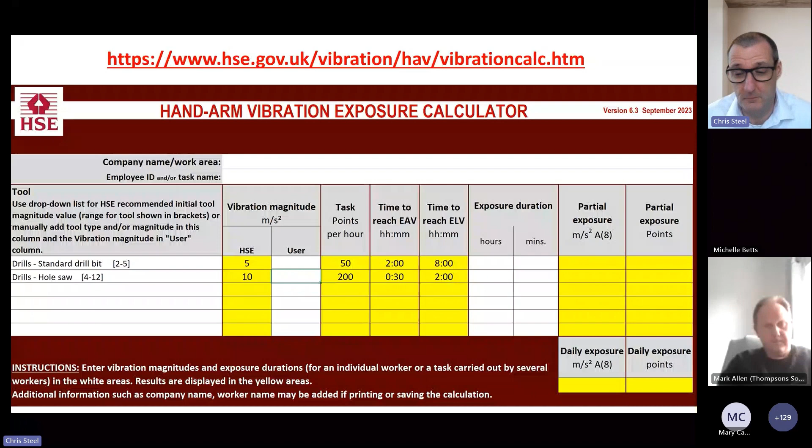So what have we done? Well, the first thing that you might have noticed is that the HAVS calculator has been updated. That's the web address that you can find it at. All we've really done here is make it so that if you now download it onto a mobile phone, it can be used on a phone, because the macros were messing that up. So if you're using an older calculator, that's fine. The thing will still work and the calculations you'll get from it will still be useful. But the new calculator should be something that you can use on your phone now.

We've also removed a PDF version of the vibration data table that used to be up there. That PDF was just a regurgitation of what was in L140. That's gone. You can still find that table in L140, but if you go to this web address, this is where you'll find the vibration data. What I would say is that any updates or any additional tools that we add to that table will most likely appear here first, because this is the simplest thing for us to update. But we've got the range there and we've got the initial recommended values.

Another big change to the vibration page is that we've now got guidance on measurement and monitoring. So in the past, we had a PDF document that was an FAQ on vibration measurement and monitoring. Fundamentally, what we're saying hasn't changed in any significant way. But it's now in a web page for accessibility reasons, and also it's actually written specifically with the duty holder in mind. I think the previous one was sort of trying to speak to multiple people at the same time and not doing a good job of that. So that's the web updates.

The measurement and monitoring practice that we're looking at, what our expectations are, is essentially what is in that page. But let's just pause for a second and remind ourselves what HSE's minimum expectation is for duty holders.

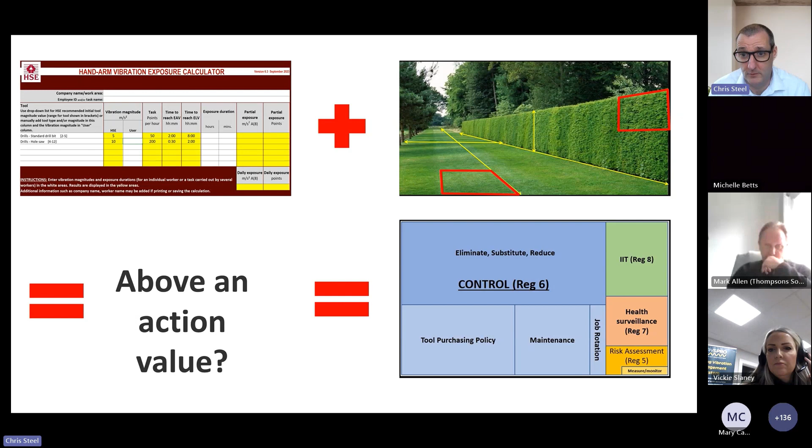Our minimum expectation is that the duty holder will figure out what their exposures are based on their understanding of their job and task, feed that information into the calculator or some calculation method, understand whether they're above the action value, and then focus their time and attention on control, information, instruction and training, and health surveillance.

And for really, really small organisations, we are still accepting of the idea that they would use the rule of thumb. So if they think they're using rotating tools for more than an hour and they're basing that on their typical work activities, if that puts them above the action value, they focus on their control activities.

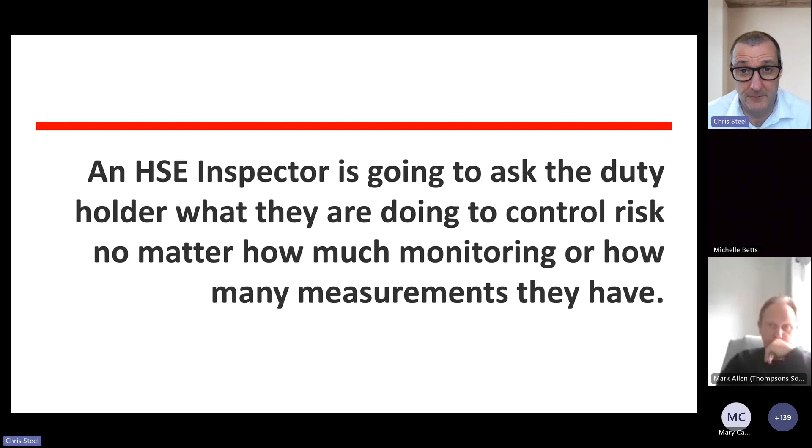An HSE inspector is going to ask duty holders what they're doing to control risk, no matter how much monitoring or how many measurements they have. We're always going to be asking about control, information, instruction, training, and having measurement and monitoring data isn't in and of itself something that will guarantee that you will not get enforcement taken against you. That is how we see the duty holder spending their time.

I know that I've shown this before. I know I said it before in the past, but I'll say it again. My concern is with your duty holder. I don't care whether you spend 1 day a week or 1 day a year on it. If you spend that day thinking about hand-arm vibration, your focus should be on the bigger boxes.

I know for people who do measurement and monitoring and risk assessment, that is the biggest part of what you're up to. But if you're a BOHS member and you're out doing measurements on site at a factory, you're there for 1 or 2 days. For the rest of the time, the duty holder's activities should be centred around control, IIT and health surveillance.

So measurement and monitoring, what are our expectations? They're now in this web page. I make no bones about the fact that I'm just going to read out what it says because, well, it will save you having to do it, but I'll try and add a bit of information as we go through it. Let's start off with the monitoring practice.

What are our expectations? Well, monitoring can help you make an initial assessment of exposure or limit exposures to those employees identified as high risk by your occupational health provider. So we do think there's a place for monitoring.

Now, you might carry out a period of monitoring exposure times to ensure that work has not changed or make periodic random sampling of exposures to verify that your control measures are effective, but you should not need to monitor daily vibration exposures. It's not something that the HSE asks for. It's not something that the regulations ask for.

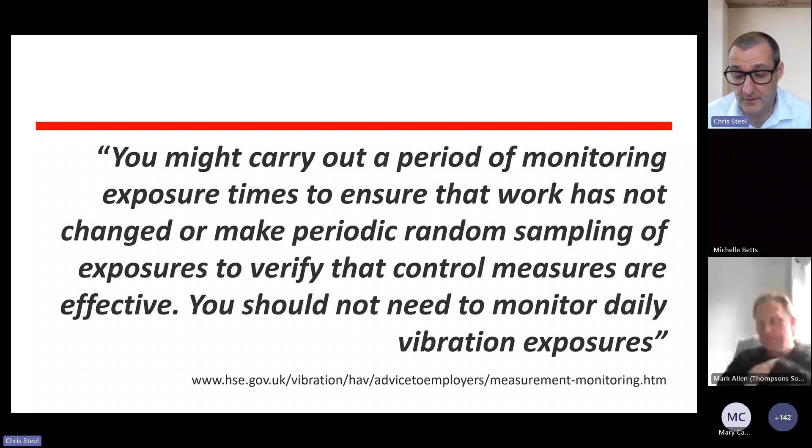If you're using a monitoring system to prevent employees from reaching a set limit, be aware that retrospective recording can result in employees exceeding the set limit before you know they've done so. And we've seen this on site, whether you're using a super duper high-end technical bit of monitoring or just a piece of paper, we have taken companies to court over the fact that they haven't acted on exceeding limit values that they have recorded.

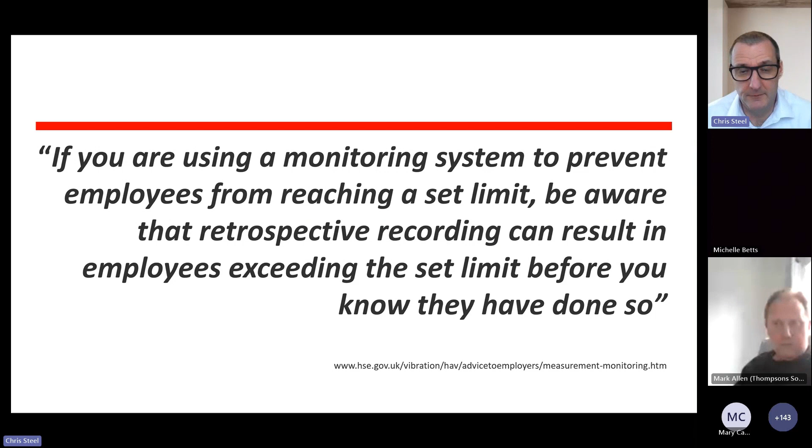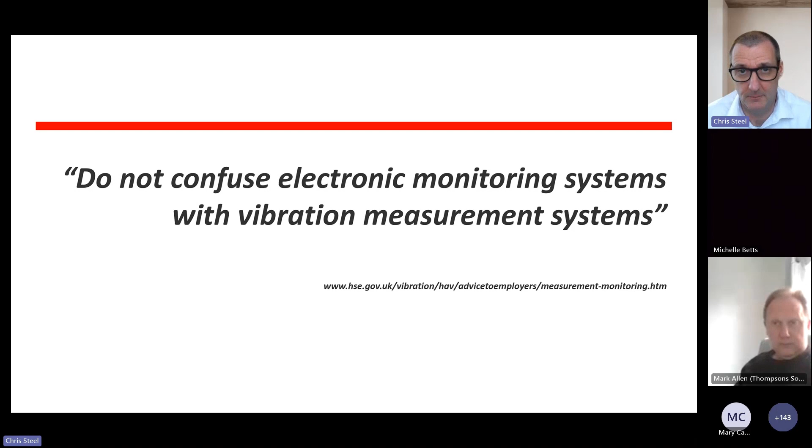And do not confuse electronic monitoring systems with vibration measurement systems. Again, we say that because we have come across health and safety consultants who have bought monitoring systems thinking that they are capable of doing vibration measurements. And in one instance, it was simply a timing device that they believed was capable of doing vibration measurements.

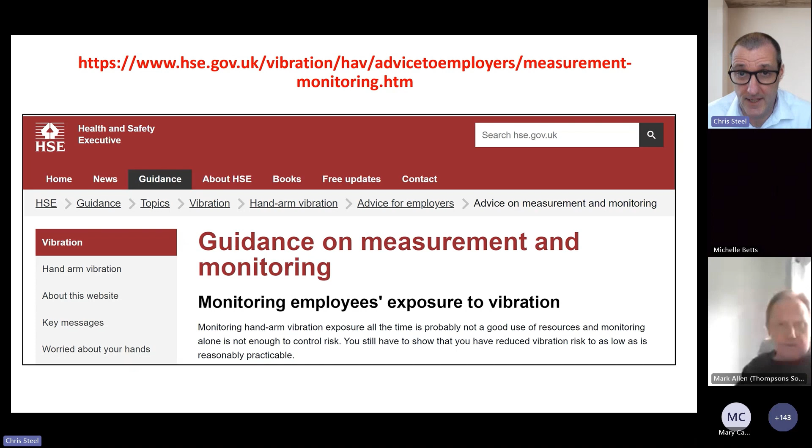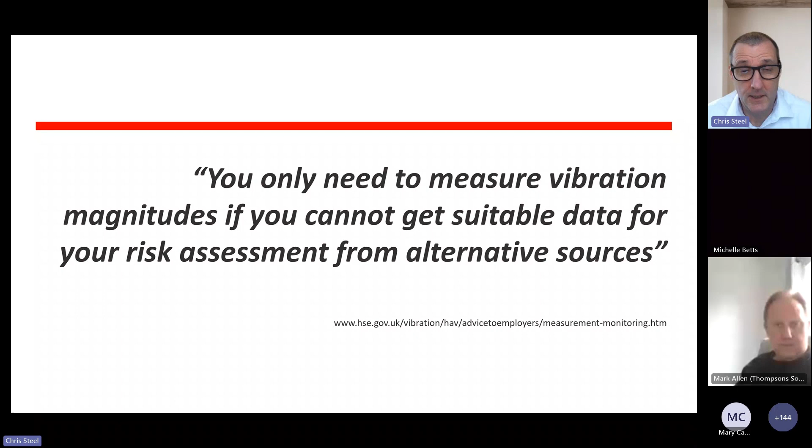So we're starting to talk about measurement. What are our expectations around measurement practice? Again, this is where you'll find it. And again, I make no bones about reading out what it says. You only need to measure vibration magnitude if you cannot get suitable data for your risk assessment from an alternative source. It's not a regulated requirement to do vibration measurements.

If you're looking for an initial source of data, we would suggest you go and look at the vibration data we've got on our website. It's not an exhaustive list, and so there will be instances where you might need to get data yourself.

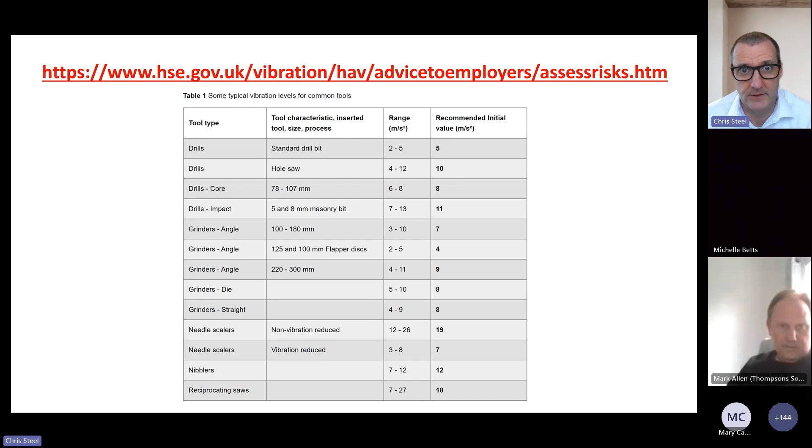If you're not doing vibration measurements and you're going to use the manufacturer's data, it's good practice to check. Is it the tool in use? Is it doing the job and task under the review? If it's lab-based data that you're using, have you added the K-value in?

And some lab-based data is more credible than others. My colleague Sue Hewitt has written an entire report on that, which is on our website. The K-value is like an uncertainty factor. Does it look credible when you compare it against other similar tools, data sets?

And you can compare it against the HSE data where we give a range. If it sits within that range, you can be reasonably comfortable that it's okay. If it's much higher, maybe there's something wrong with it. If it's much lower, check that it is a low vibration tool. And we generally suggest that you try to find 2 or more data sources if you're using existing data.

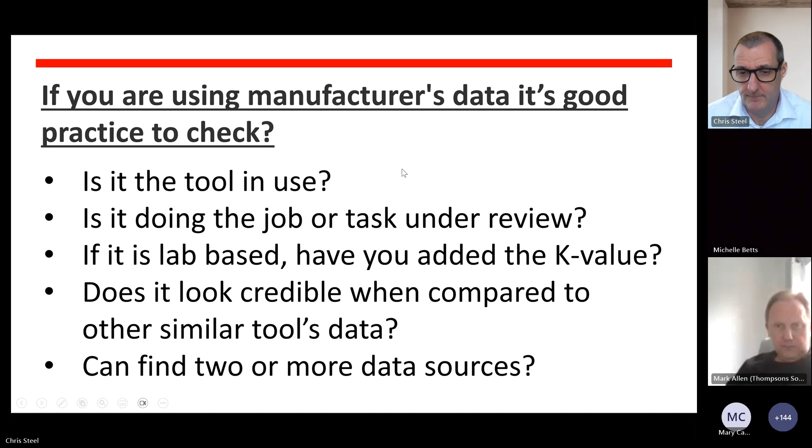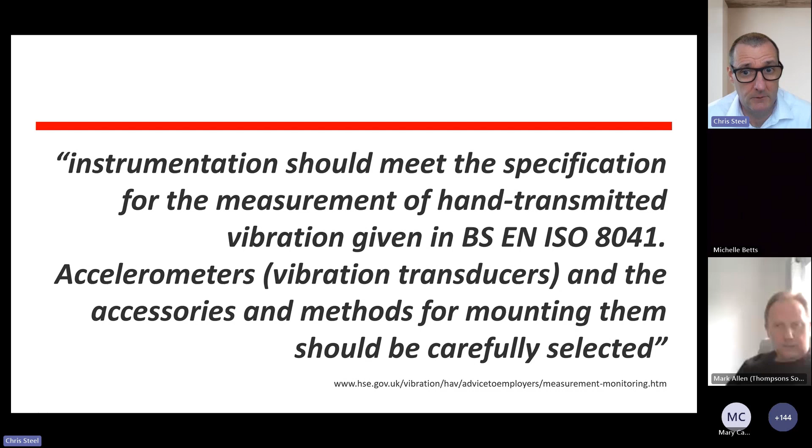Appendix 2 of L140 and BS 5349 should be used for guidance on measurement. And instrumentation should meet the specifications for measurement for hand transmitted vibration given in 8041. So that's the accelerometers, the transducers and their accessories, and methods for mounting them should be carefully selected. Well, what do we mean by carefully selected? Because that can be quite difficult to get a handle on.

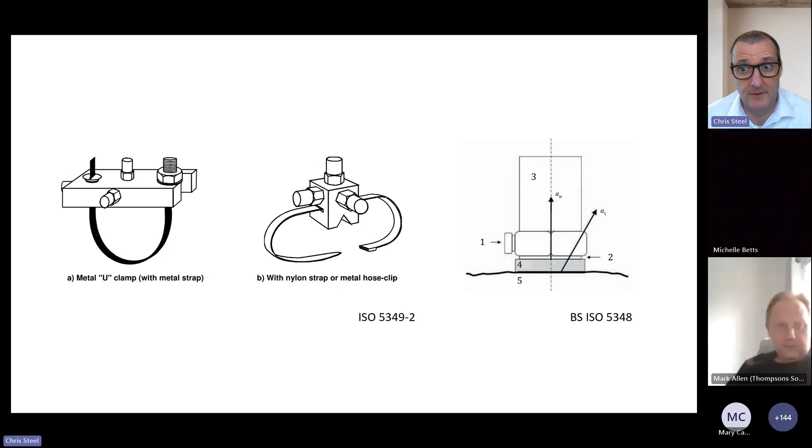The first starting point for us is something which is physically clamped or physically attached to the power tool. And there's an expectation of what that would look like given in the standards. But we know that the positioning of that accelerometer can affect the measurements. So if you stick it at one end of the handle, you might get a slightly different level than you would get at another end of the handle.

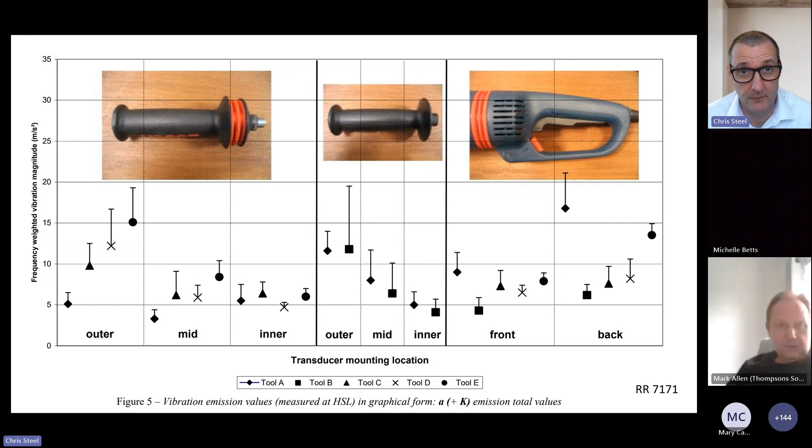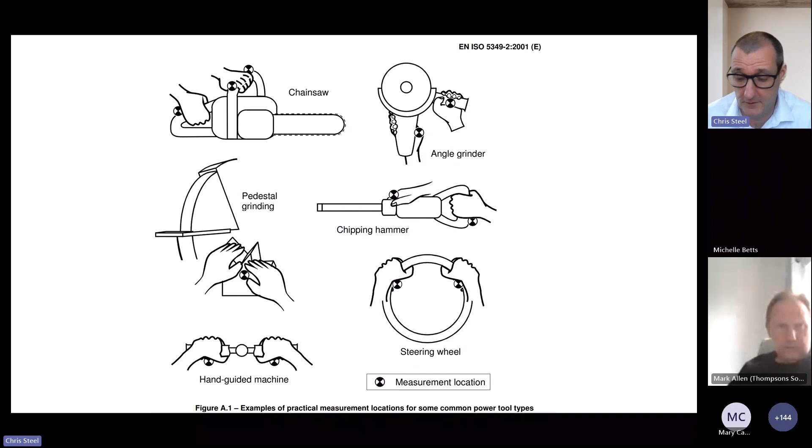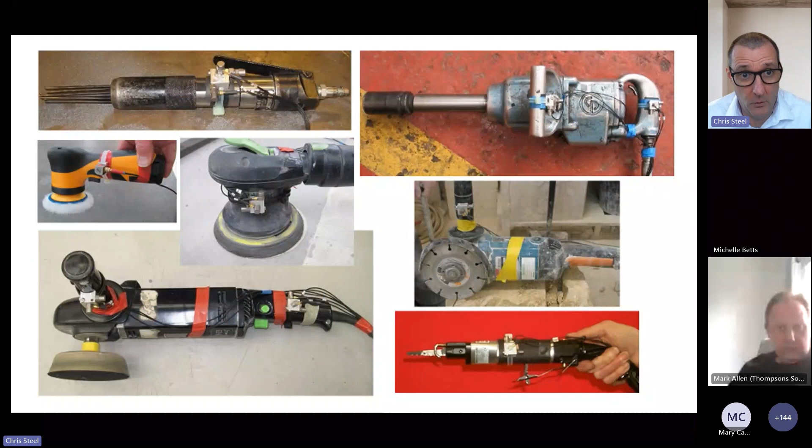And so there is advice given in the standard again on examples of practical measurement locations for some common power tools, but this doesn't cover everything. And we thought maybe it would be helpful if we showed you a load of photographs of where we have attached the accelerometers to the power tool. So you'll see here that we're generally trying to get it as close to the hand position that the person's working on. We can't always achieve that, but we are trying to get to that position.

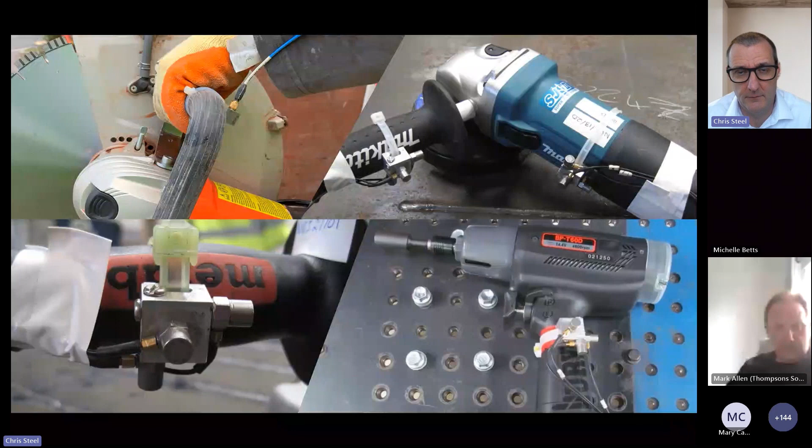And you'll also see that we're often putting bits of tape onto the equipment, partly to help maintain the location of the accelerometer, but sometimes to stop the cabling from being moved around. We've got loads of photographs like this, and we have talked about whether we should try and put them up on the website so that people can see what we do. And if you're doing what we are doing, we're unlikely to take an issue with it.

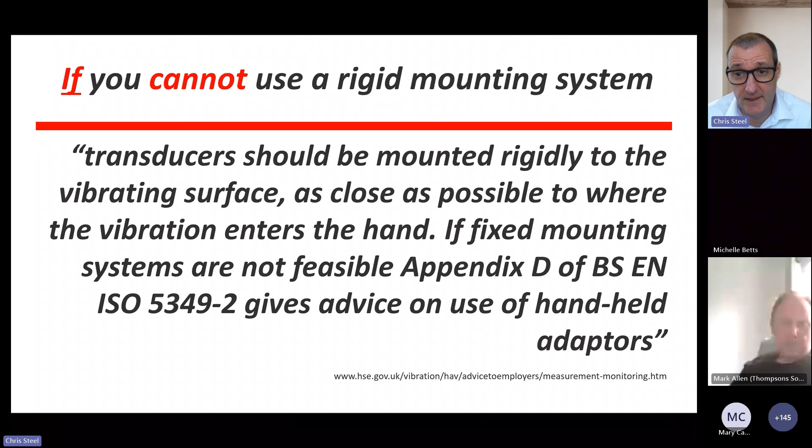Right, what if you can't use a rigid mounted system? Because that can occur. So the starting point is transducers should be mounted rigidly to the vibrating surface, as close as possible to where the vibration enters the hand. If fixed mounting systems are not feasible, Appendix D of 5349 gives advice on the use of handheld adapters.

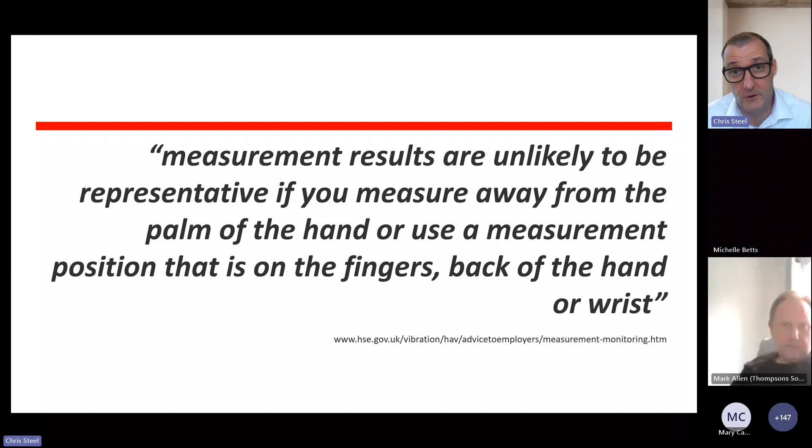Measurement results are unlikely to be representative if you're measuring away from the palm of the hand or use a measurement position that's on the fingers, the back of the hand or the wrist. And we are talking specifically about gathering measurement data that you're going to use to populate your risk assessment. If you're worried that you've got a piece of equipment that isn't set up to do those measurements, then ask the measurement supplier to state in writing that their equipment complies with 8041 and it can be used in compliance with 5349.

And the last thing is, if you want to obtain vibration measurements for your own tools, you need to arrange for a competent person to carry out measurements for you using specialised equipment. There's three parts to getting good measurement. One is that you're using the correct equipment. Two is that the equipment is correctly attached to the tool. And the third is that the person who's undertaking the measurements is competent to do so.

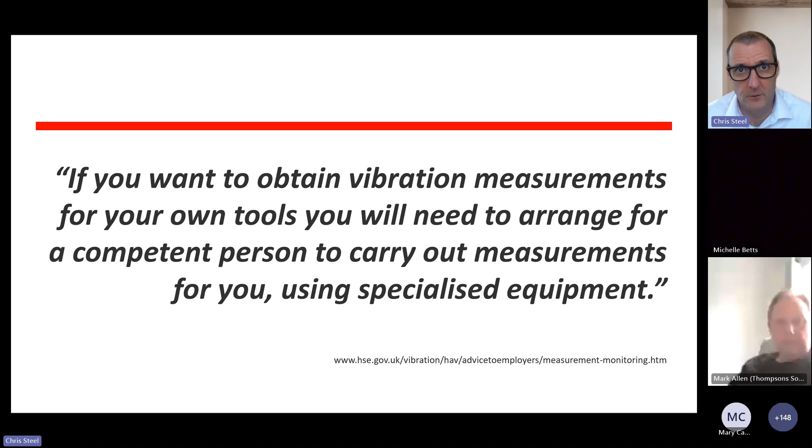So that leads us on to our third part that we were going to talk about here, which is third-party advisors and report writing for HAVS. So over the past few months, we've been working with some vibration consultants to talk about what are the expectations around competent third-party advice.

So a good consultant should be able to demonstrate that they're competent to do the work, help duty holders understand how the law applies to them, and provide advice on ways to reduce hand-arm vibration exposure. So let's just go back through that again.

The question that you maybe want to ask yourself at this stage is, do you actually need to be able to do vibration measurements in order to be a competent advisor on hand-arm vibration? Well, actually, no, you don't. A lot of the training courses that are out there are on the management of hand-arm vibration.

And really, if you're competent to give advice and you can use the calculation sheet that we've got and the data that you can get from manufacturers and the data that's already there, then there's nothing to stop somebody from being a competent advisor if they can demonstrate that they're competent to do the work. They can actually help the duty holder understand how the law applies to them. So do they need health surveillance or information, instruction and training, and provide advice on ways to reduce exposure to hand-arm vibration.

If you're looking at a report, a good report should have things in it like what the job, the task or the worker's typical exposures are, and are they above the action values. We also expect to see who will need health surveillance, whether it's a particular group of individuals, people that work in a particular space, or named individuals, who will need information, instruction and training, and what controls the duty holder could adopt. Generic advice is good, specific controls are better.

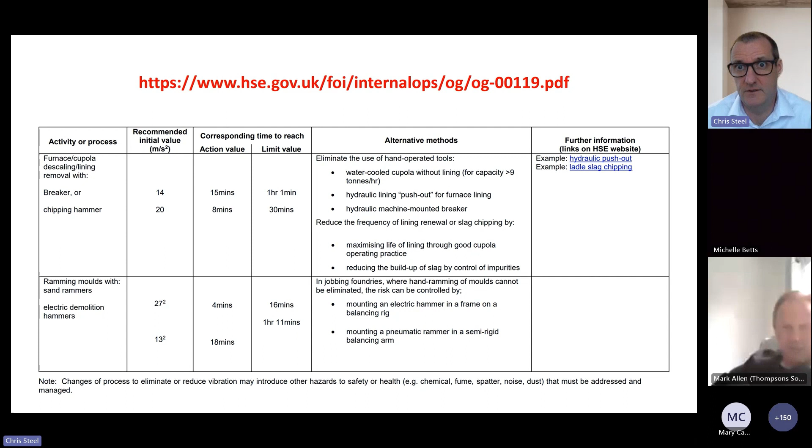We would really like to see this type of information that's in our operational guidance being put into reports for advice to duty holders on a standard basis. What about understanding exposure? Because that's something else that we were asked about. Well, regular and frequent for us is usually at least about 3 days a week of power tool use. I would include seasonal working as exposure that could be regular and frequent. If someone is cutting grass all summer and not in the winter, we know those people can get hand-arm vibration syndrome, so we would expect that to be included.

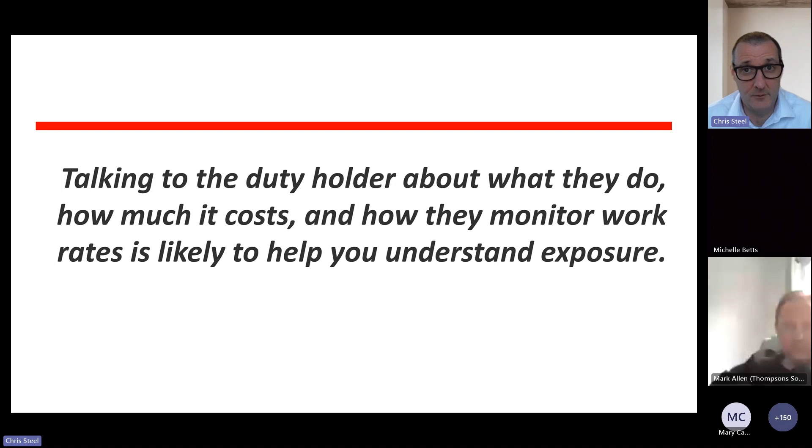But the best way for you to understand what the exposures are is to talk to the duty holder. Talking to the duty holder about what they do, how much it costs, how they monitor work rates is likely to help you understand exposure a hell of a lot better than anything else. Right, what do I mean by that? Well, if you've got people cutting grass and trimming hedges and they understand how long it takes to do 1 square metre, you can pretty quickly estimate how long they're going to be spending just by how big the area of grass is or how long the hedge is.

And we've got local authorities and councils up and down the country that are doing this type of thing. We see them using takeoffs from maps and drawings in order to estimate exposures. And let's be honest, the size of a typical football pitch doesn't get any bigger. So if they've got 30 football pitches to cut, they've got a fair idea of how much that's going to expose them.

We've got metal fabrication companies that are able to tell us from the drawings that they produce what vibration exposures are likely to be. They do this by understanding that every 500 mil of welding is equal to a certain amount of use of a handheld grinder. And so they know that by measuring up all the welds on a component, they can estimate vibration exposures.

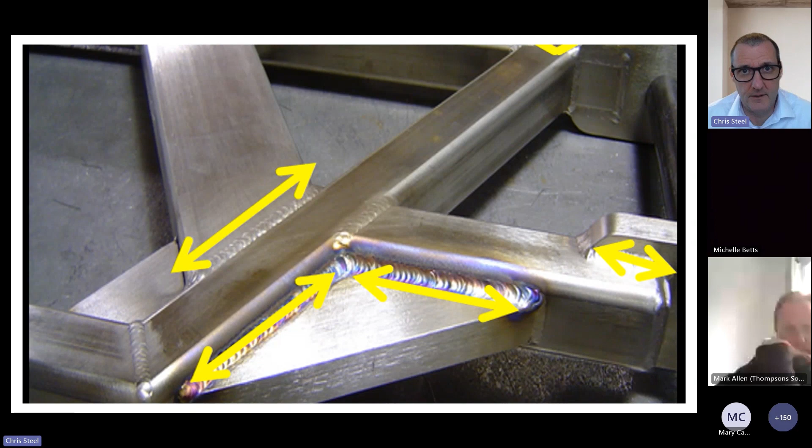We've got companies who have gone to the extent of weighing their grinding discs to see how much material is removed from the disc before it gets replaced. And then from that process, they can then understand what someone's exposure is based on how many discs they've used over the course of a typical working day.

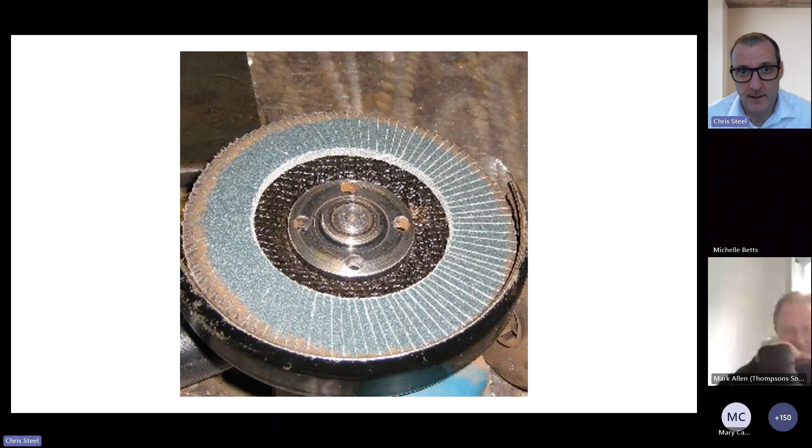And we have got at least 2 house builders, timber kit house builders, who understand what their exposures are based on their technical drawings, their building information models and their Revit files. They know exactly how many cuts, how many screws, how many nails, how many drills go into these buildings, and they can tell us that for a 2-bedroom house or a 3-bedroom house, the first fixed joiner will be exposed to a certain amount of vibration, whereas the second fixed joiner would be exposed to a different amount of vibration.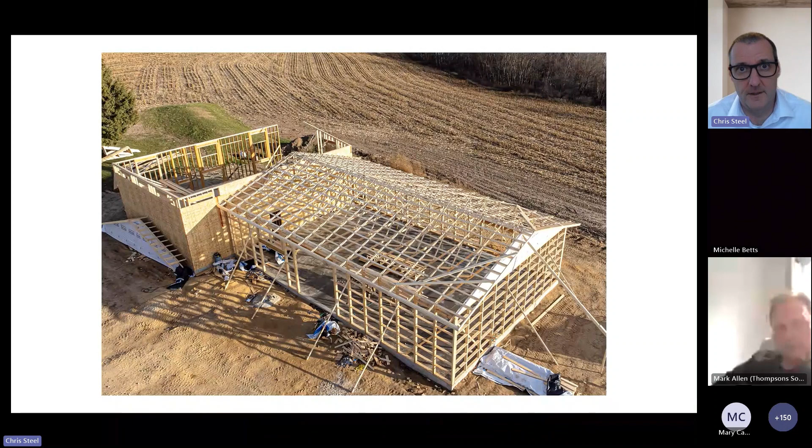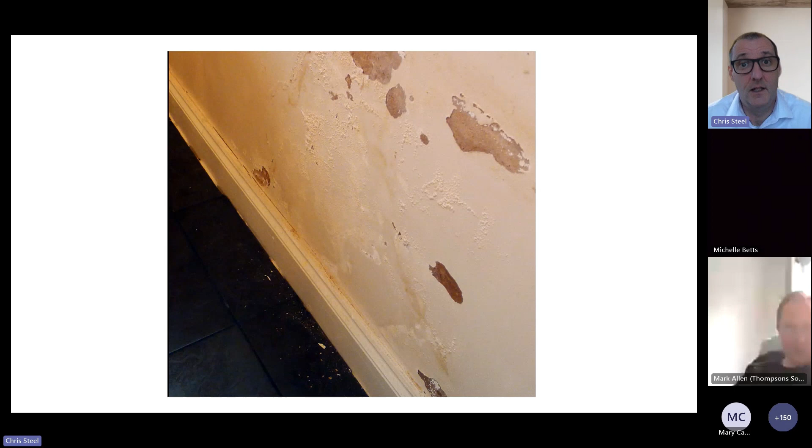And we even have companies that do dry rot and wet rot replacement who can tell us what their vibration exposure is before they even get to site. They do this when they send out the surveyor, who measures up and prices a job on how many square meters of walling has to be replaced. And by knowing what type of wall it is, when they do that calculation for the pricing, the Excel sheet that they have for the pricing automatically calculates a vibration exposure for each job. So they can then make decisions on how many people to send to site, which tools to use, and whether they should spread the work over 2 days.

Right, so what's next for HSE? So 24-25, this coming work year, HSE inspectors are going to be focusing on hearing protection for the first time in quite a while. We're going to be talking about CUFF a lot. We're using that as a handle to get people's understanding of hearing protection up. CUFF is about the condition of the hearing protection, whether it's been used, is it fitting the ear, is it fit, and is it fit for purpose, has it been specified correctly? I'm hoping that there'll be a joint BOHS UK Hearing Conservation Association meeting later on this year where we can talk about that, but I've got some other talks lined up as well, so look out for them.

And HSE are also working on web advice on what third-party vibration consultants should be doing. So some of the stuff that I've talked about today will potentially end up on that web page. I will not make any claims as to when that will happen because I've upset quite a lot of people in the past by saying that I'm expecting a web page to go up, and it took a hell of a lot longer than anybody ever expected.

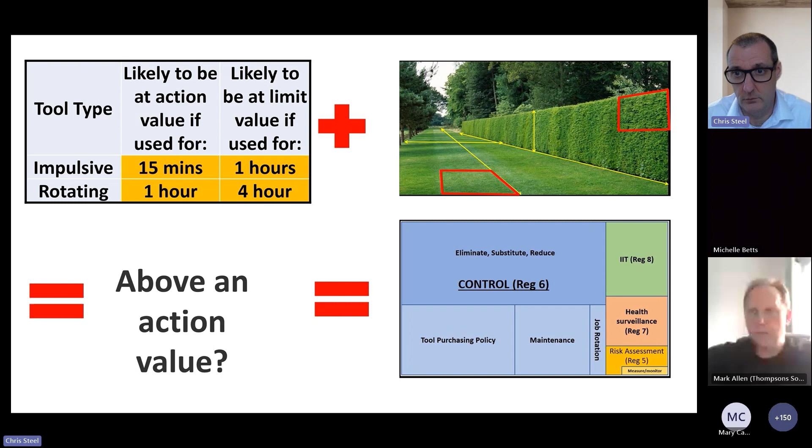Right, so let's just pause again before we finish and just remind ourselves what HSE's minimum expectation is for a duty holder. Rough estimation, or a good credible estimation of what they're up to based on their jobs, their tasks. Understand whether they're above the action value, and if they are, the regulations come into place and they focus on control. And the bigger the box, the more time we expect them to spend on that. What we have talked about today over the past 27 minutes is that little box down there in the corner.